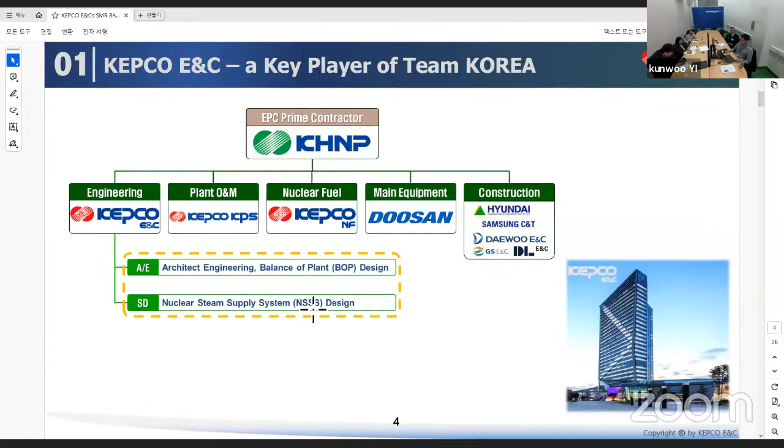Kepco E&C has over 45 years of engineering experience and offers a full scope of engineering services for nuclear power plants. It is not only a designer of OPR1000 and APR1400, but also involved in Korean SMR projects such as SMART and i-SMR. Development of BANDI is also in the works based on our proven engineering technology and experience.

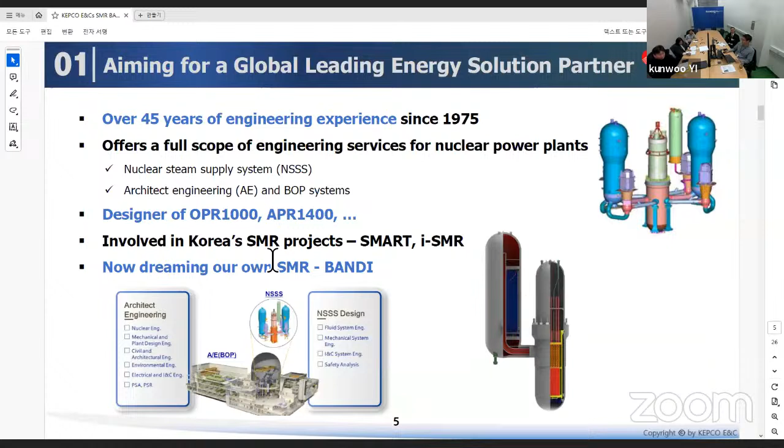I want to talk about the SMR market and our choice for marine nuclear power systems. The economics of small reactors comes from the economy of mass production, meaning the bigger volume of production it has, the more profitable it becomes. Standardization of design is also important for mass production, so a big volume of work with a standardized design would be needed to make it competitive in the market.

But we think it may be too optimistic to predict such a big market in the near future. So we thought small reactors may be more suited for niche markets if used for three applications. First, distributing power for remote or isolated areas where populations are scarcely distributed over a wide area. It's also applicable to supply heat needed for various industrial processes instead of fossil boilers. And it's also suited for marine-based power supplies.

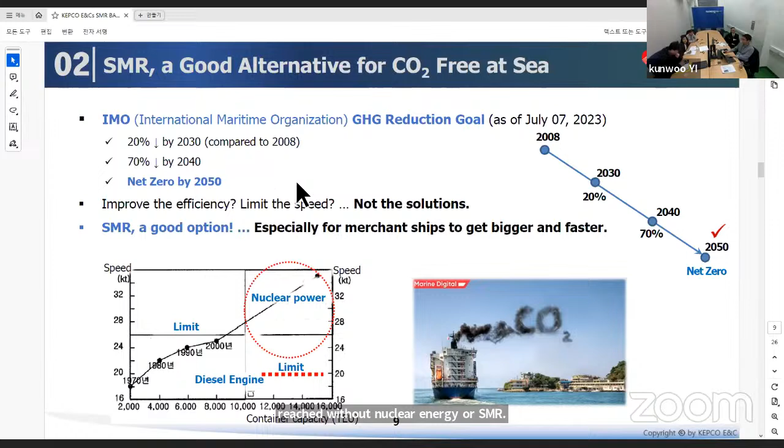Marine nuclear power systems could be applicable to 3 different types of applications. The first is gravity-based power generation and floating power plant ship propulsion. Floating power plants and nuclear ship propulsion based on SMR could be good business models. The concept design of BANDI considers both of them, but floating power plant seems more feasible for the near-term market.

Nuclear propulsion ships are mainly exposed to harsh oceanic environments, and this makes the design requirements very difficult to accomplish. However, most technologies applied for marine-based nuclear power plants could be extended to nuclear propulsion ships in the near future.

This chapter will give an introduction of BANDI, our SMR model, and I'll explain key design features of BANDI and our effort to collaborate with the marine industry in Korea.

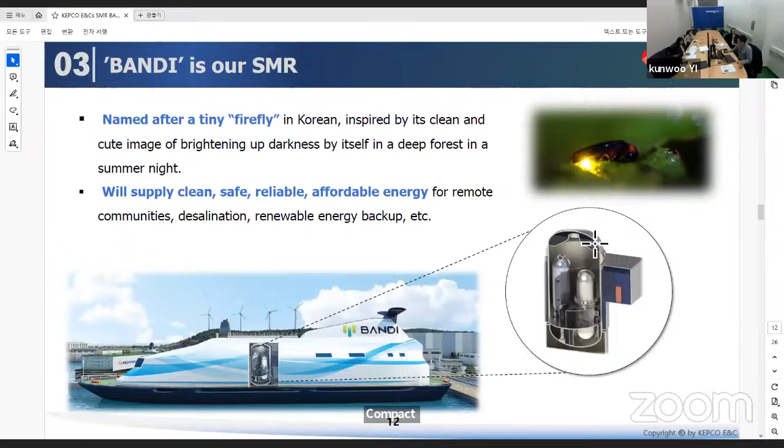BANDI is expected to have a feature of automatic load following, which is just a concept for now. We also have to consider design conditions from the marine environment that BANDI would be exposed to — for example, motions of 6 degrees of freedom is one significant load factor to be analyzed, and this is an area we are not very familiar with. So we are currently in collaboration with a shipbuilding company and schools renowned for this technology in Korea.

And BANDI, let me explain block type in detail.

BANDI has a so-called block-type reactor coolant system, consisting of one reactor vessel block and one steam generator block. These two blocks are nozzle to nozzle, connected to each other without large pipes, and designed in accordance with ASME BPVC Section 3, Class 1 NB 3000. Upon compliance with this code, we can eliminate a large pipe break, one of the most serious accident scenarios, from the design basis. Compared to integral type SMRs, the block type SMR would be simpler and easier in surveillance and maintenance, more proven in design and manufacturing, and more scalable in size.

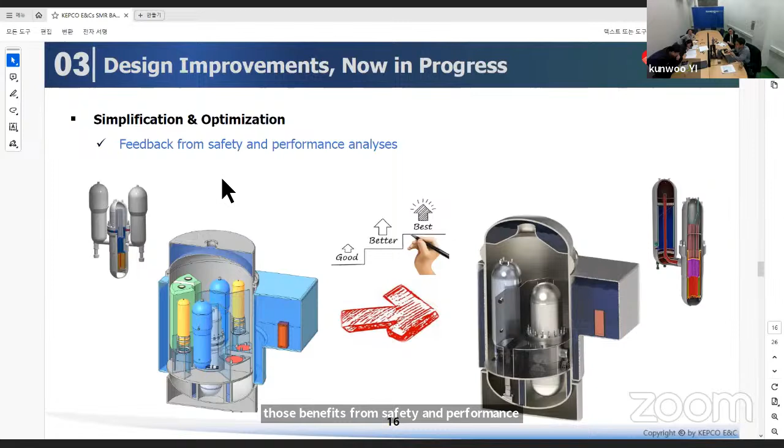Simplification and optimization is being proceeded to make a design improvement, and there are a lot of feedbacks on the design to make it safer and perform better. And those feedbacks from safety and performance analysis always motivate us to get more focused on the detailed design.

We have many proven experiences in designing nuclear power plants, but we still need collaborations with the marine industry to make BANDI a perfect model as a floating SMR. There were MOUs last year and joint works for business models, economic feasibility, and engineering between the nuclear system and floating body are in progress.

We are very challenged by some technical issues, and those are mostly coming from the concept of BANDI as a floating body.

And because we consider BANDI as a floating nuclear power system, we have to consider ship motions excited by tide, wave, and wind generated by the sea environment. The motions are defined by 6 degrees of freedom: surging, swaying, heaving, pitching, rolling, and yawing. The displacement of each movement should be calculated and analyzed to be used as a load.

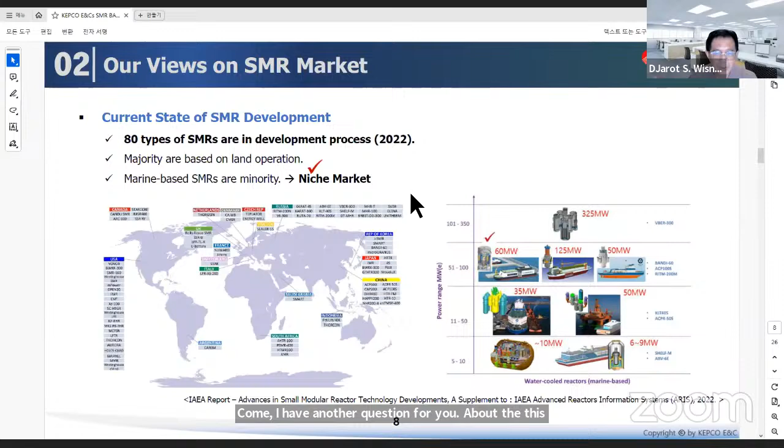I have another question about BANDI. Do you have a timetable to use BANDI around 2030, according to your roadmap? It means conceptual design 2023, basic design 2025, and commercialization 2030, isn't it? Yes, we share this roadmap with the shipbuilding industry, and we will follow this roadmap—that's our plan.

But money is the problem. We need a lot of money to commercialize, both for the technical things and the commercial things—we need some big money. So we are talking with the shipbuilding industry to build up the fund. But this is our dream.

Can I ask another question? In your net zero emission target in Korea, with your projected electricity or energy projection, is there any possibility that you have to use this kind of BANDI technology? In Korea, since it's a small country, we have many nuclear power plants of bigger size, so the small ones may not be feasible in Korea. Nowadays renewable energies are increasing, and we also have a plan to build a big nuclear power plant. So unfortunately, we don't see the market in the near future for small ones in Korea.

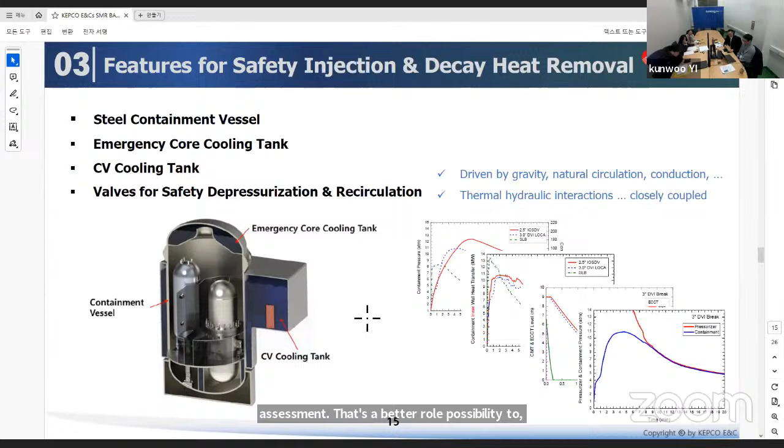Yes, we also consider that kind of extent, but that's why we make the containment vessel - that's one of the characteristics of the SMR. So we make analysis and assessment. There is a very low possibility of release of radioactive material to the outside of the containment vessel. We need to prove it, and the regulatory body will verify and validate our design.

In the nuclear industry, when we develop a new kind of reactor design, we consider this kind of accident scenario, and then we come up with the design requirements considering those accident scenarios. So first we have to clearly define the design requirement, then our engineers can solve the problems anyway.

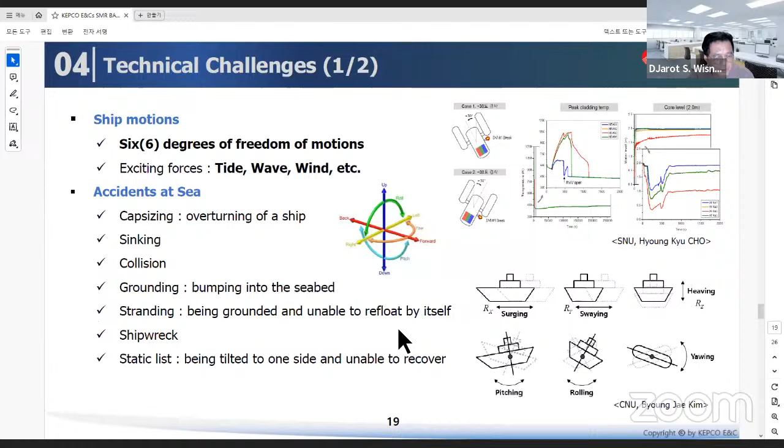Another question from the audience: this is about marine nuclear power. It means you can use it as a floating nuclear power plant, or you can use it on a barge. There is one technology being promoted in Indonesia - I don't want to openly name the vendor - but they are going to use a barge, and on the barge they put the nuclear power plant. In your case, the BANDI case, are you using the coastal version, or something? It means floating nuclear power plant, isn't it?

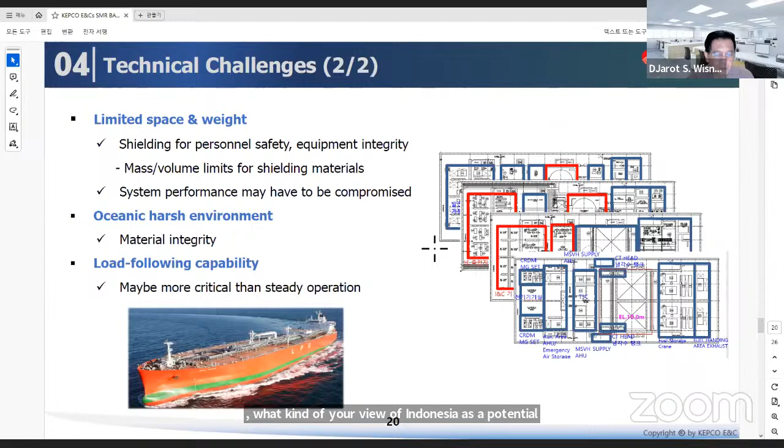Let me explain to you. Some islands in this country, they use the diesel power plant with maybe small numbers of the power of 50 megawatts or less than that. So the challenge for us is how to replace it with other technologies. Maybe 60 megawatt is good, is suitable. But some other area, they need the heat for industries. So this is also a good potential market in Indonesia. When you see this kind of potential market in Indonesia, what is your view of Indonesia as a potential place to deploy nuclear power, your nuclear power?

As I said before in the presentation, these three types of different applications are all possible, I guess, in Indonesia. Because as you said, BANDI as a floating SMR can produce heat and supply heat for the industrial process, and it definitely can distribute power for remote and isolated areas and island areas, and this is... Yeah, that's it. Okay, well, I understand.

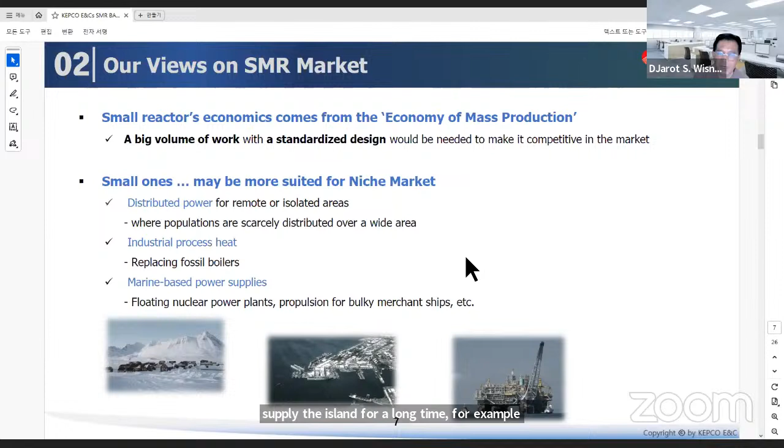In addition, I remember when the French company called FlexBlue came to us. Maybe you know FlexBlue, they have experience building submarines. They came to us promoting, saying this is suitable for you because you have a lot of islands, so you can use this kind of technology. We can use this FlexBlue at the base of the sea, then supply the island for a long time, for example. So, but I expect, or I can imagine that this kind of demand is high in Indonesia for remote islands, and also this kind of BANDI technology for industrial needs is also a good potential market, I think.

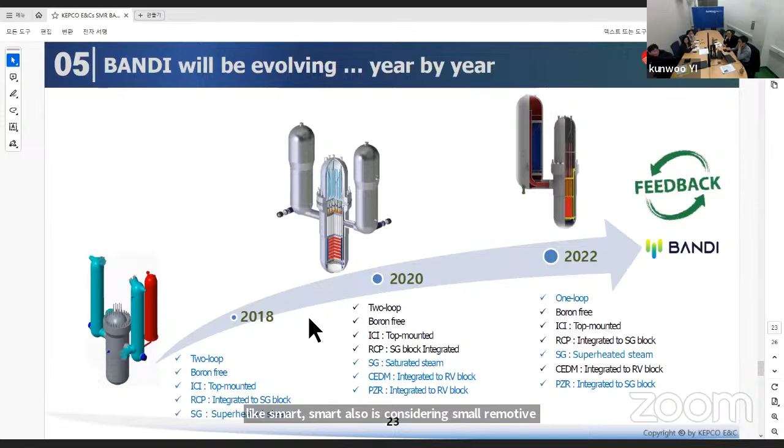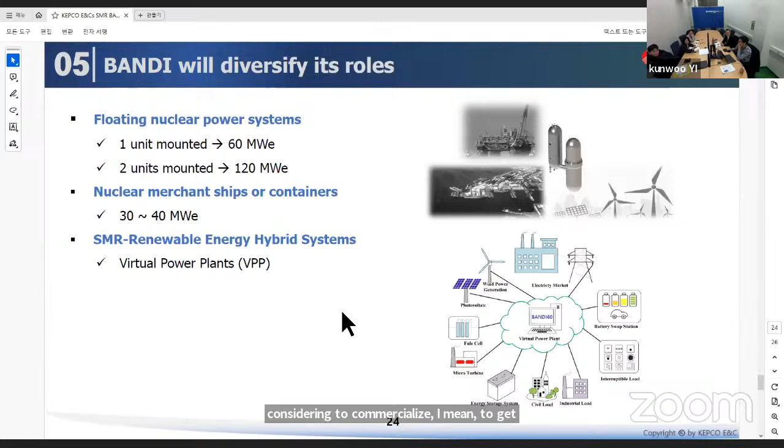For example, in addition, you mentioned when we started to consider this kind of market like remote islands, it begins at 2018, I think you have seen in the presentation material. So it's like SMART, SMART also is considering small remote islands, remote territory, like some places gas cannot be provided, small islands with target. And BANDI also considers the same market as SMART. And we are considering to commercialize, to get real as a first, in 2030, mid-2030s, we think it would be commercialized in that time period. So we consider around 2016-18, after SMART has been developed.

And you also made a question about SMART. Kepco also has a joint SMART project with KAERI already since 2010, I think, maybe longer than that. And we have developed, I think invested more than, I don't get the number exactly, but we have joined the design also. Most of it, I think, is the BOP part, not the primary part, I think it's the secondary part. We have participated in that design, and that evolved into iSMR and other SMR technology. And also, BANDI is one of our SMR models that KEPCO E&C is developing.

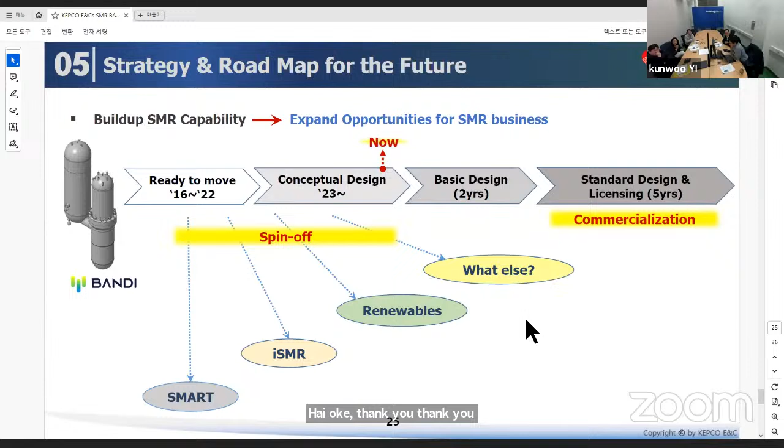Okay, thank you very much. Yes, Jenny, do you have any question? Yes, thank you so much for your explanation.

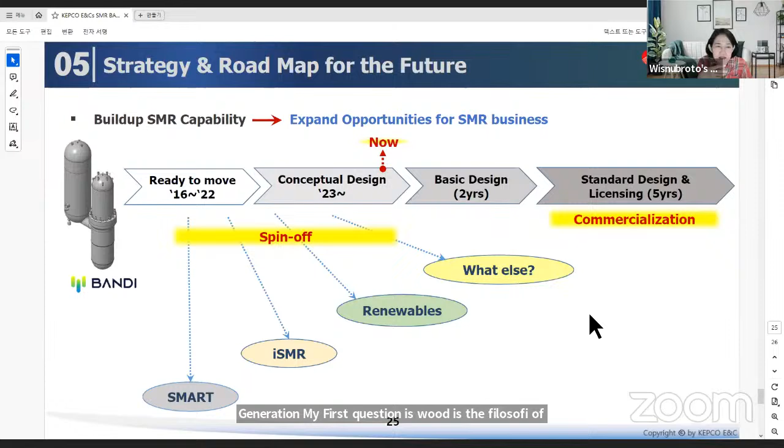I will continue Pak Djarot's question about the cogeneration. My first question is, what is the philosophy of Korea designing the floating system? It looks like Russia. Russia designed some floating systems, like RITM, etc., because they will use the electric product for mining or something like that. So in this case, why do you design BANDI as a floating system? Where is the location that you will implement BANDI for the first time in Korea? This is my first question.

And the second question, you already mentioned also that BANDI can be used for cogeneration and VPP. What do you mean by cogeneration itself? Can we use the electricity for other cogeneration on non-electric application, or can we also use the heat coming from the reactor itself as cogeneration? And the third one is, how long is the design life of BANDI? Thank you.

Last question is simple: 60 years. 50? 60 years. 60 years. Okay, 60.

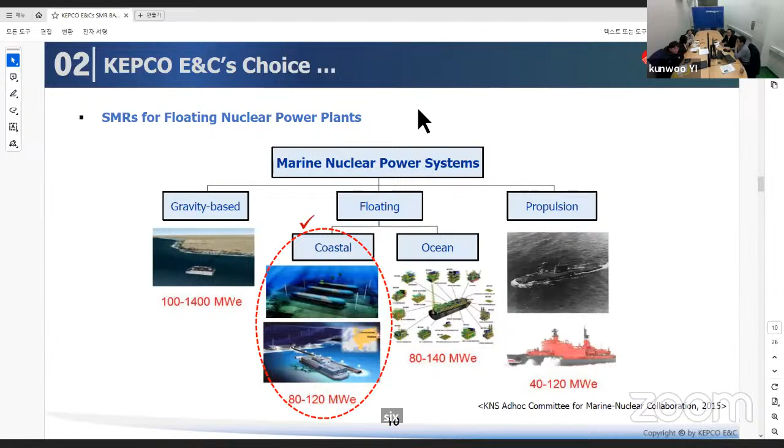And then the other question, about the location, the first location that you will implement BANDI as the first floating NPP in Korea.

Is there any other philosophy why you designed BANDI? It looks like Russia's design, for mining or something like that.

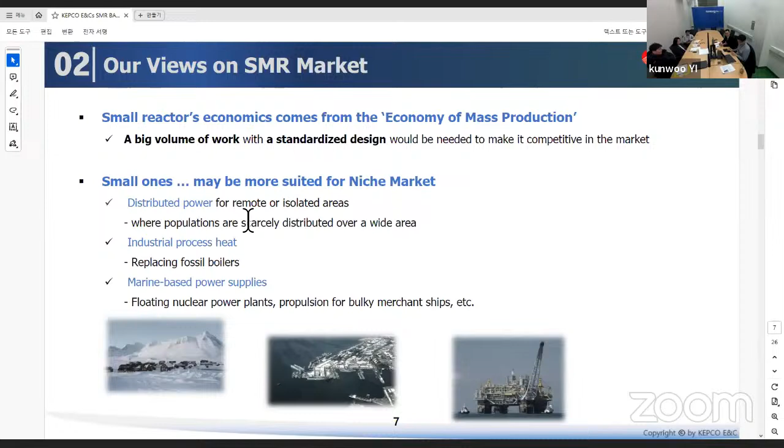Our primary target is the overseas market, for export. As Mr. Kim presented, we have been interested in SMR for about 10 years. SMR has big potential in the near future, but on the land-based SMR side, there are already a lot of competitors, so we have to choose other areas. That's a kind of niche market. The marine-based application is the market we chose. That's why we are developing the floating nuclear power plant, and we are looking at the overseas market, not the Korean market.

Okay, but it's still just an idea, it's not planned yet. But steel companies in Korea are located near the ocean, and they want their own SMR. One option is floating, but public acceptance and law present many obstacles. Still, the steel company wants our floating SMR and they are interested in it.

So you will not build and operate the first BANDI as a demo plant first in Korea? No, actually we don't have a plan yet. So you don't have any plan to build a demo plant in your own country first to prove that BANDI is good and safe?

Yes, it's very important. As I said, proving the technology is very important, so we are trying to cooperate with our government, but we don't have a plan yet. Okay.

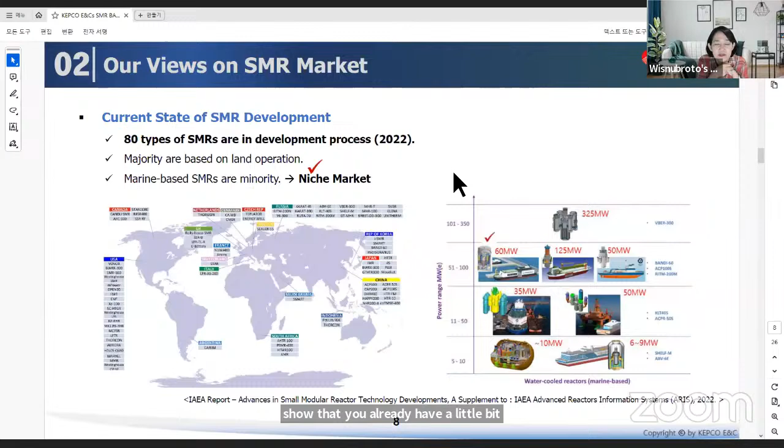Any questions, Bugeni? No? Another one — even though this is still under basic design, I'm very sure you already have a plan. What is the cycle of the fuel that you designed for BANDI? Maybe 1.5 years, or 3 years, or something like that? 5 years. 5 years, okay.

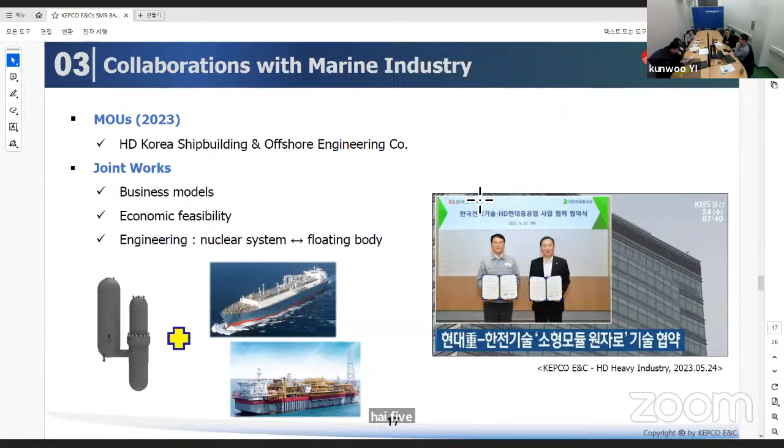Okay, terima kasih, thank you Bugeni. I also have a question about the fuel cycle.

For example, if we buy BANDI and operate it in Indonesia — some of the idea behind the floating power plant technology is that after some time, say 2 or 3 years, when you want to refresh the fuel, the ship goes back to the original country, they change the fuel, then it comes back to Indonesia. Is that the scenario, or should we supply the fuel ourselves? And the second question is about radioactive waste — should it be managed or disposed of in the territory, for example in Indonesia, or will it be taken back into Korea? Sorry, this may be a silly question.

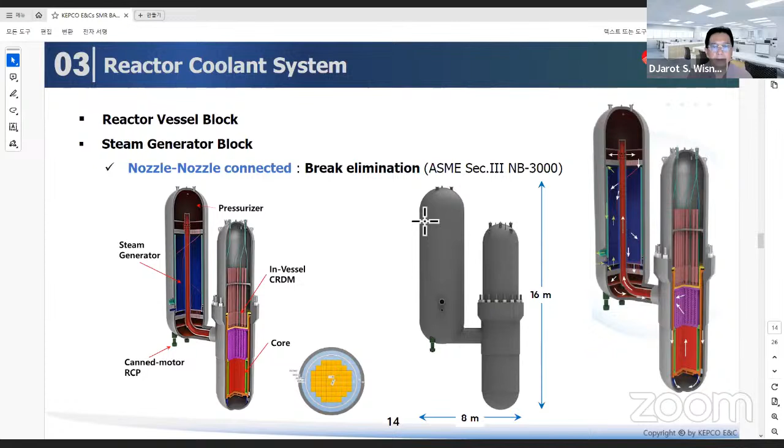Actually, we are working with the shipbuilder HD Hyundai, and we are expanding cooperation with HD Hyundai and a ship classification company, ABS, American Bureau of Shipping. So we are looking for partners, like Indonesian companies. We want to make the process more visible and develop a business model together with good customer aspects, care, and regulation in mind. So we're looking for partners. If you're interested in joining this program, please contact us through KNS or directly connect with our company. Very soon, maybe next month or within a few months, we're going to launch a new development program with HD. So please join the program. Okay, thank you very much.

This is a very interesting webinar because at peak we reached 280 participants. This is great for disseminating nuclear power technology. Since I and other colleagues work for the National Research and Innovation Agency, BRIN Indonesia, I will pursue this opportunity to open cooperation between Kepco and our agency in government, for example to cooperate on assessing whether this technology is suitable for us on certain islands. Because net zero emission targets without nuclear are impossible. This is the declaration of the government of Indonesia. It means we need many technologies, not only large reactors but also small modular reactors, and of course micro reactors.